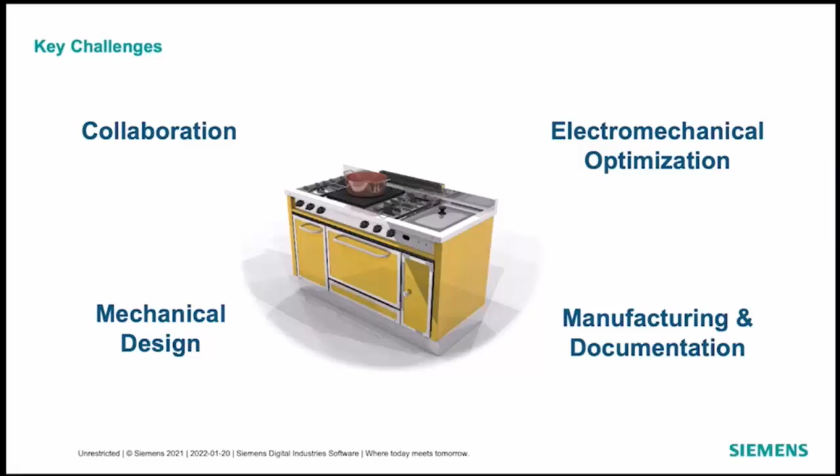The first key challenge we'll discuss is collaboration. Collaborating with customers and suppliers, you need to collaborate quickly and easily with suppliers and customers, then share multi-CAD design data in a controlled way while protecting intellectual property.

Next is managing projects and changes. You need to manage data that's created and consumed throughout the product lifecycle, manage engineering changes efficiently, then manage release to manufacturing.

Last is managing customer and regulatory requirements, ensuring that the device, as delivered to the end user, meets the requirements and complies with industry regulations.

The next challenge is for mechanical design: designing plastic enclosures and housings. Consumer products often use plastic components for enclosures, housings, handles, covers, etc. You need to design plastic components quickly and accurately.

Then design sheet metal enclosures, including enclosures and housings for power supplies and electrical components, with faster 3D mechanical design to create complex designs quickly and accurately. We use proven components and catalog parts where possible to speed design.

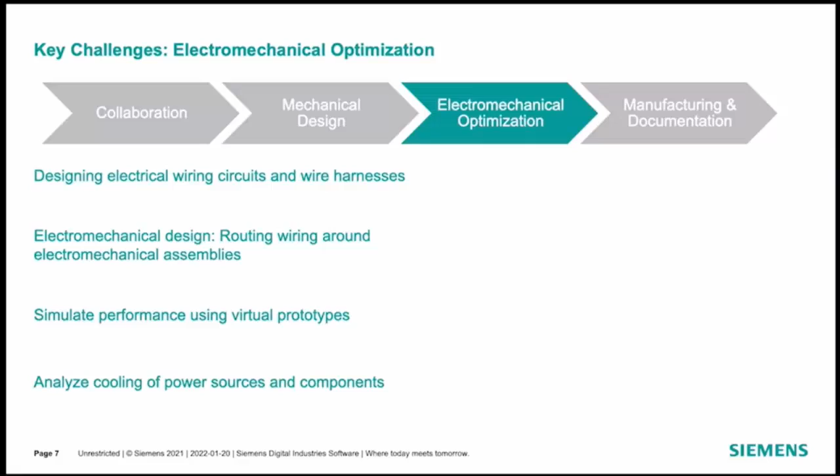For the last key challenge, manufacturing and documentation: manufacturing accurately and efficiently, minimizing the cost and time required to build physical prototypes, and manufacturing small volume parts efficiently.

Manufacturing accurately and efficiently also means reducing errors and rework in manufacturing, choosing the best manufacturing process, and taking advantage of new manufacturing technologies.

Then create manufacturing instructions and end-user manuals, ensuring that consumer durables are manufactured and used correctly to ensure performance and reliability.

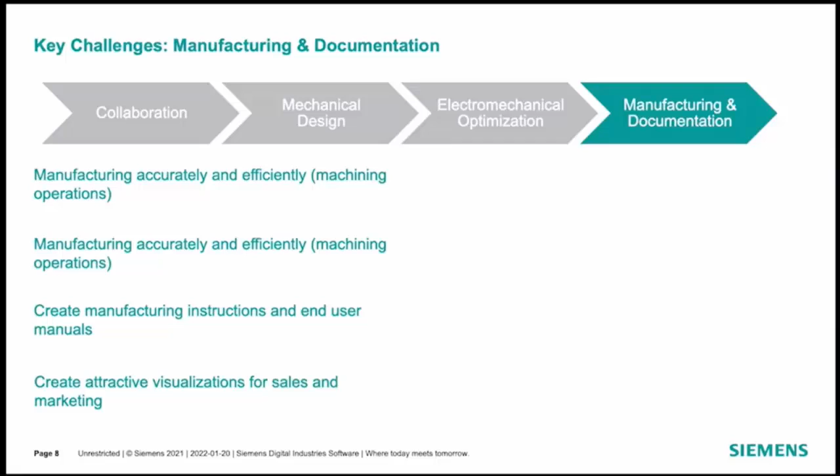Create attractive visualizations for sales and marketing to improve communication of design to prospective customers and communicate the unique value of innovative solutions.

Now let's take a look at the solutions and what's new in Solid Edge 2022. Our first solution is for collaboration.

First is data management. Here are some of the challenges: you need to manage data that is created and consumed throughout the product lifecycle, manage engineering changes efficiently, and manage release to manufacturing. So how can we help?

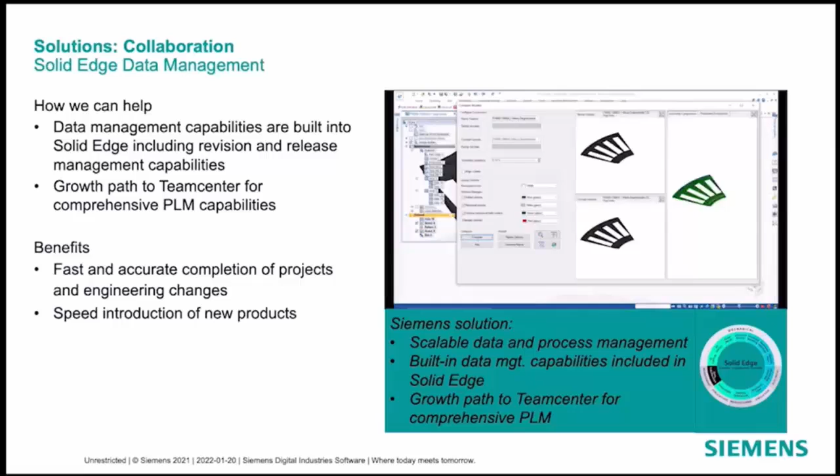Data management capabilities are built into Solid Edge, including revisions and release management capabilities, with growth path to Teamcenter for comprehensive PLM capabilities. The benefits include fast and accurate completion of projects and engineering changes, and speeding introduction of new products.

Next is requirements management. The challenge is ensuring that the device as delivered to the end user meets the requirements and complies with industry regulations. How can we help?

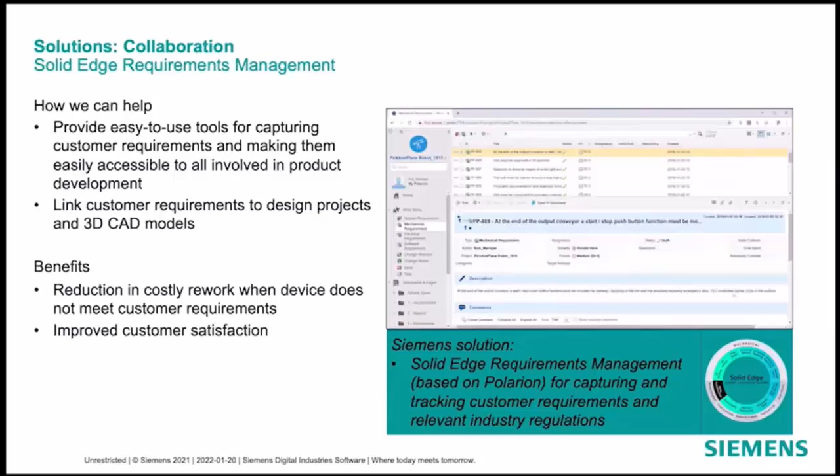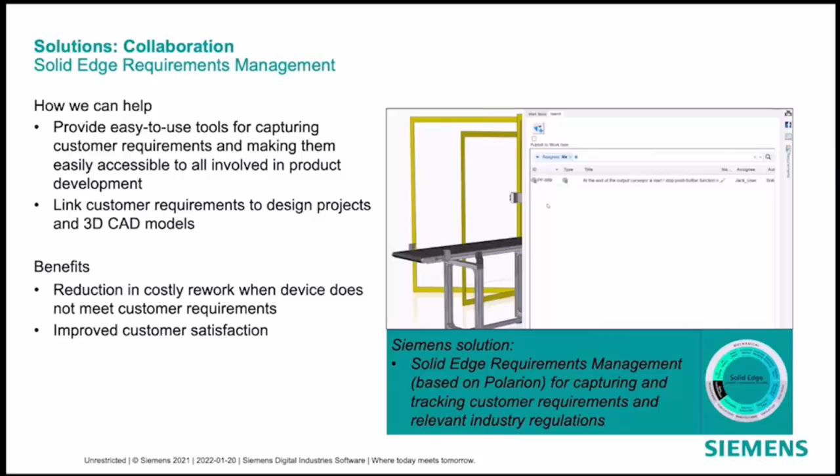We provide easy-to-use tools for capturing customer requirements and making them easily accessible to all involved in product development, then link customer requirements to design projects and 3D CAD models. The benefits are reduction in costly rework when a device does not meet customer requirements, and improved customer satisfaction.

Then we have Xcelerator Share, augmented reality, messaging and notifications, any device instant-on access, multi-user override protection, and connection to Teamcenter. How can we help? With easy-to-use cloud-based collaboration tools for sharing multi-CAD data with suppliers and customers, and integrated visualization, markup, and augmented reality capabilities for multi-CAD data.

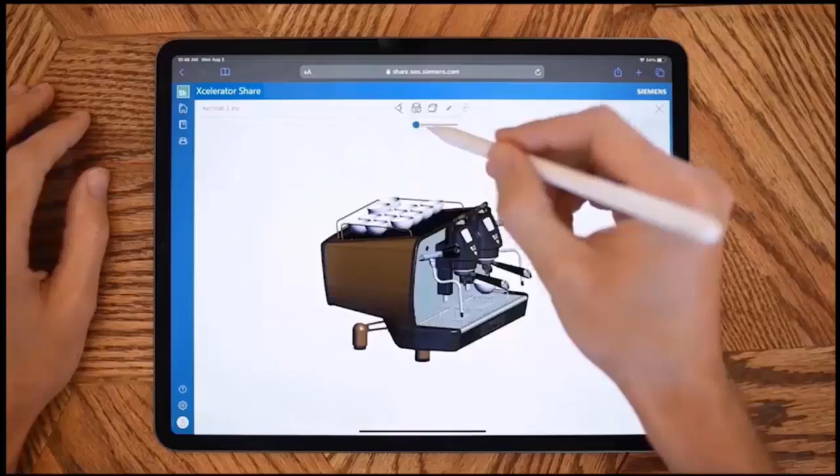Let's take a look at Xcelerator Share. For CAD files, there is an integrated 3D view environment where you can hide and show parts, explode assemblies, section, measure, and markup. This is great for manufacturing and design reviews.

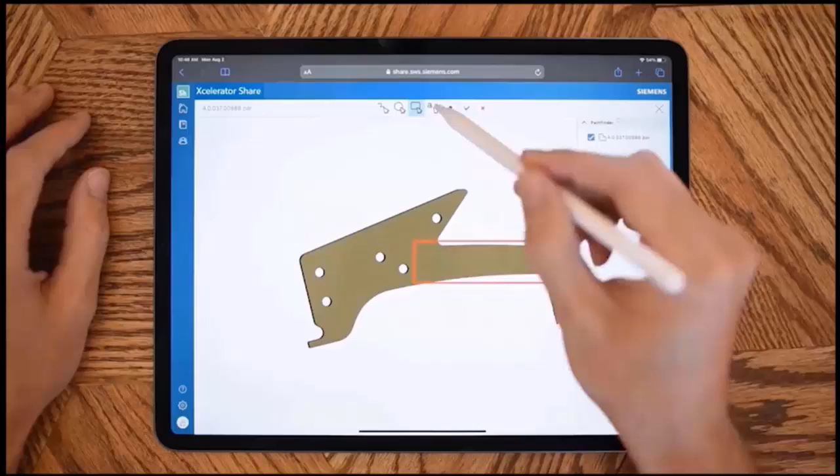Here, we're identifying the need for some changes with the markup and some text annotations. Xcelerator Share offers maximum traceability as all markups are recorded, enabling a conversation back and forth on any of the issues you're tracking. It records who made any markup, and when it was made, and we can also easily go back to the markup at any time.

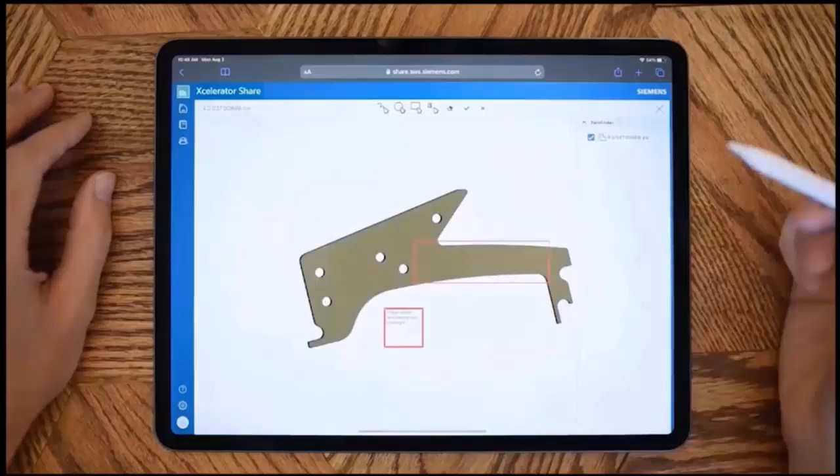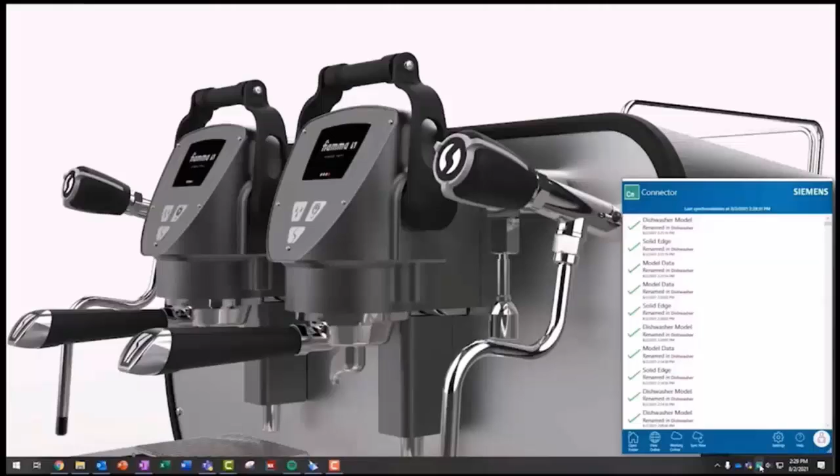With Share, you can also connect your CAD, synchronizing your data from your desktop to the cloud. Here we have the same coffee machine project on our desktop, represented simply as a folder. Any data that we have in the folder will get synchronized in the background. In Solid Edge, we can securely sign into Xcelerator Share and see those cloud-based projects.

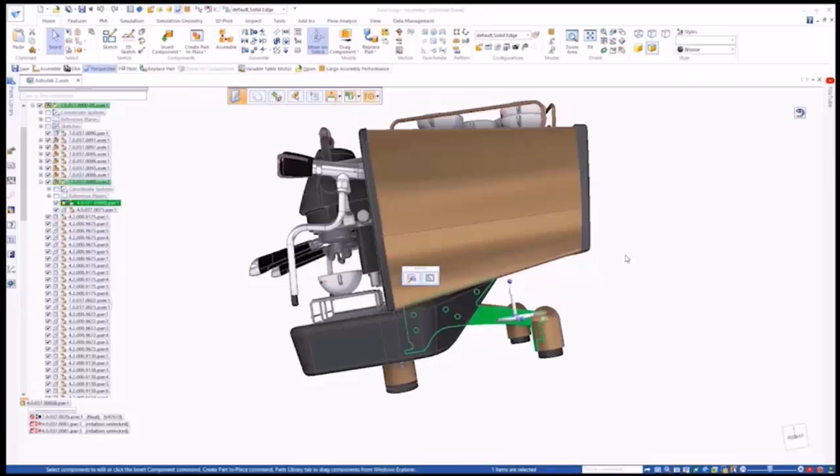The espresso machine can be opened and we can get right to work on the part in question. The designer can easily access these same markups in the cloud directly from within Solid Edge, and then go ahead and complete the work, which in this case is to add a cutout to the leg of the espresso machine. Once completed, another markup continues that two-way conversation and collaboration with other stakeholders on that issue is tracked appropriately.

Another great capability is sharing projects with anyone. Simply enter the email address of the person you'd like to share with and choose their access permission level. Here, we can choose view, or view and download, or edit and download, depending on how we want to protect our intellectual property. We will share this design with one of our colleagues and our customer and give them appropriate access.

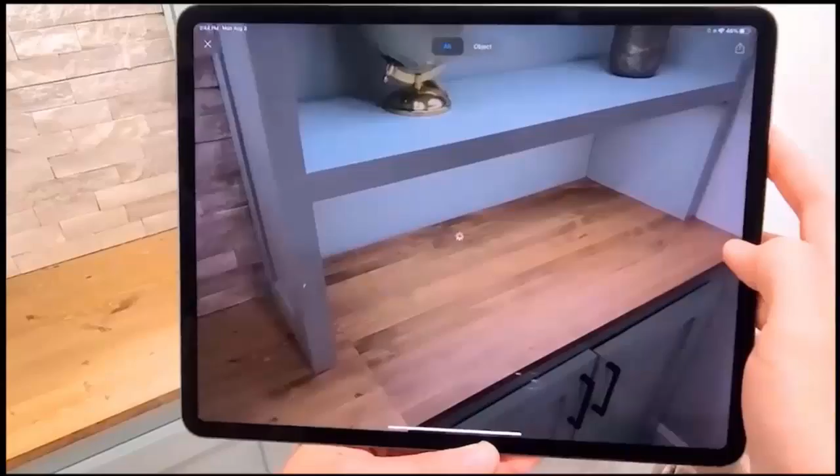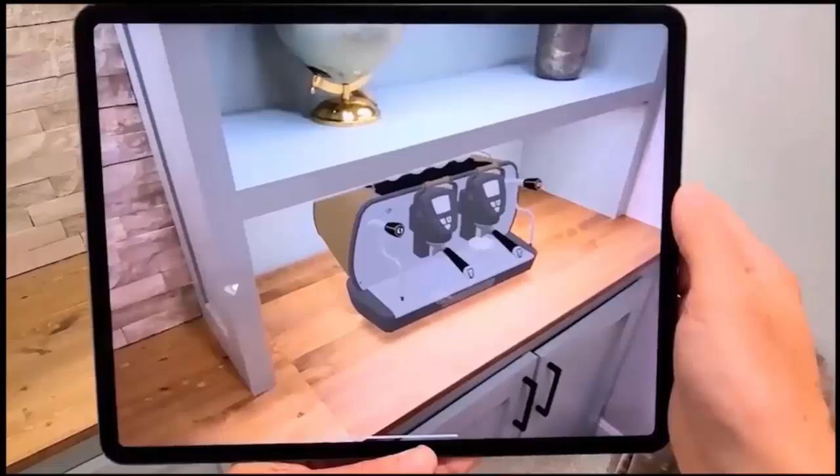Finally, with Share's augmented reality functionality, we can see exactly how our design will look in a real-world environment. It will snap the design onto any surfaces seen through the camera lens at the correct scale. Finger gestures can be used to manipulate the model and easily visualize what the design looks like in the real environment.

The ability to collaborate effectively is an increasingly important area today, as traditional supply chains are now under pressure from an uncertain environment around tariffs and global health concerns. Examples of collaboration can include working with a customer in a different location to review the design of a component, or working with the manufacturer of mold tooling to investigate an issue encountered in the manufacturing process.

Siemens has easy-to-use cloud-based collaboration tools that enable you to share design data created in different CAD formats with customers and suppliers, and this can be done in a way that protects the intellectual property of your designs.

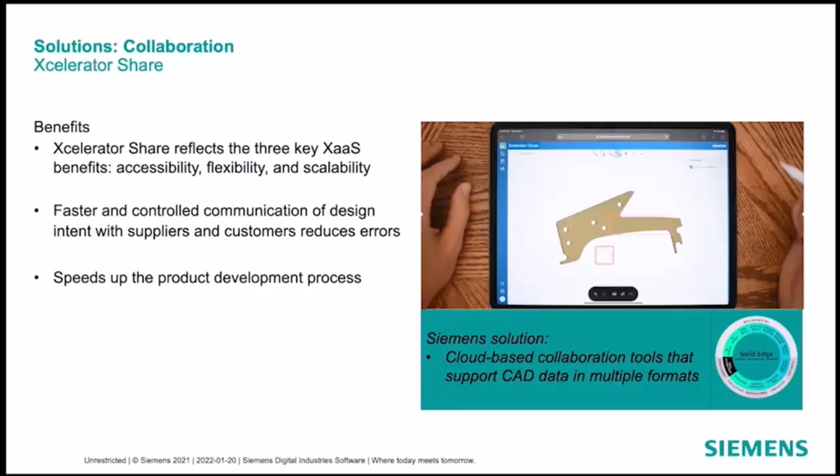So the benefits: Xcelerator Share reflects the three key XaaS benefits: accessibility, flexibility, and scalability. Faster and controlled communication of design intent with suppliers and customers reduces errors and speeds up the product development process.

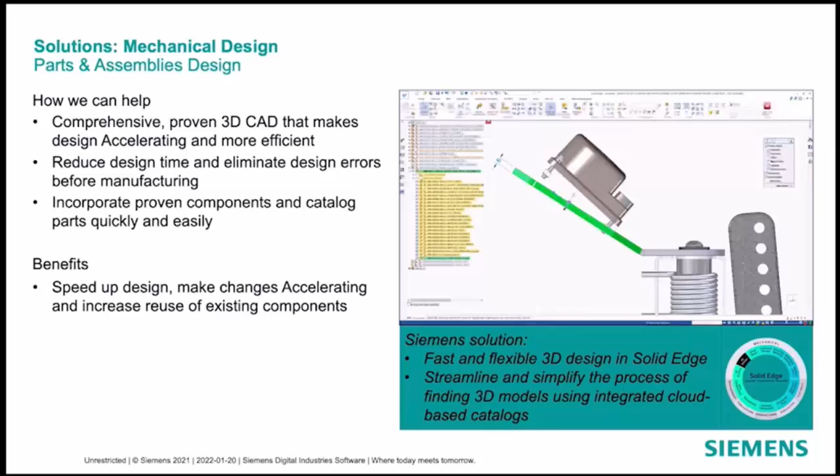Next solution is for mechanical design, for parts and assembly design. So the challenges: create complex designs quickly and accurately, and reuse proven components and catalog parts where possible to speed design. So how can we help?

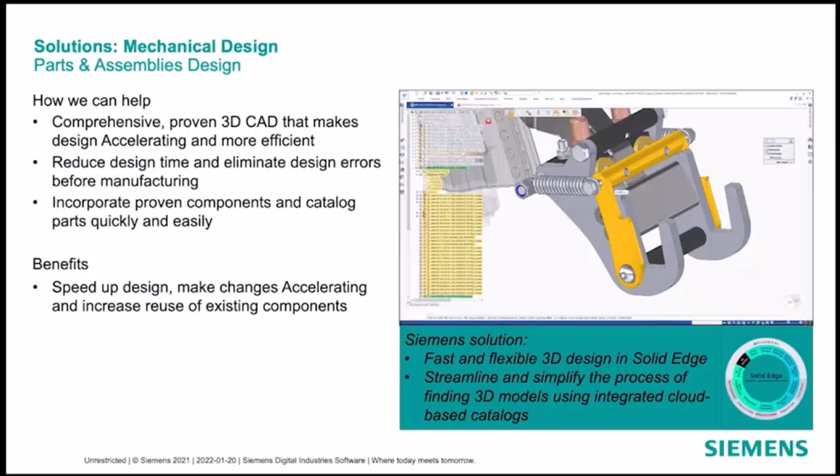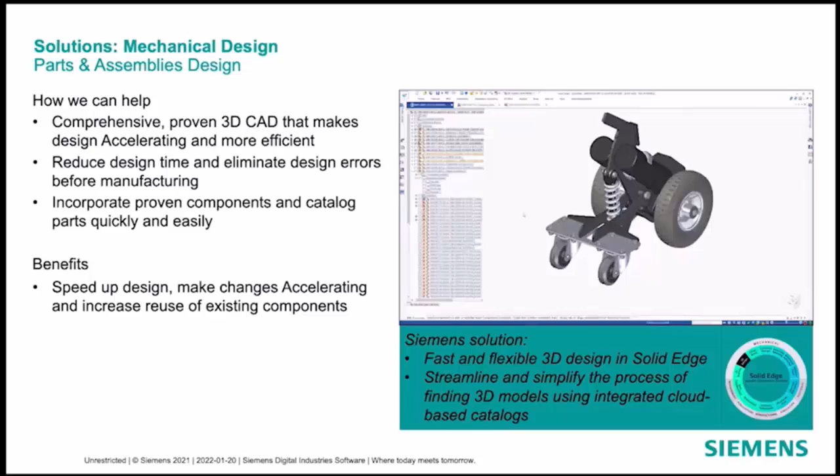Comprehensive, proven 3D CAD that makes design accelerating and more efficient: reduce design time and eliminate design errors before manufacture, and incorporate proven components and catalog parts quickly and easily. So the benefits: it can speed up the design, make changes accelerating and increase reuse of existing components, and deliver new products sooner and with lower business risks.

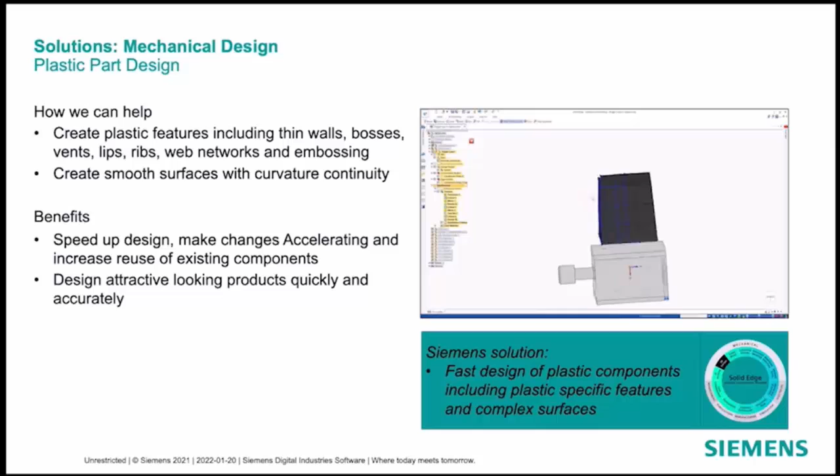Then for plastic part design, so the challenges: electronic devices often use plastic components for enclosures, housing, handles, and covers, and design plastic components quickly and accurately. So how can we help?

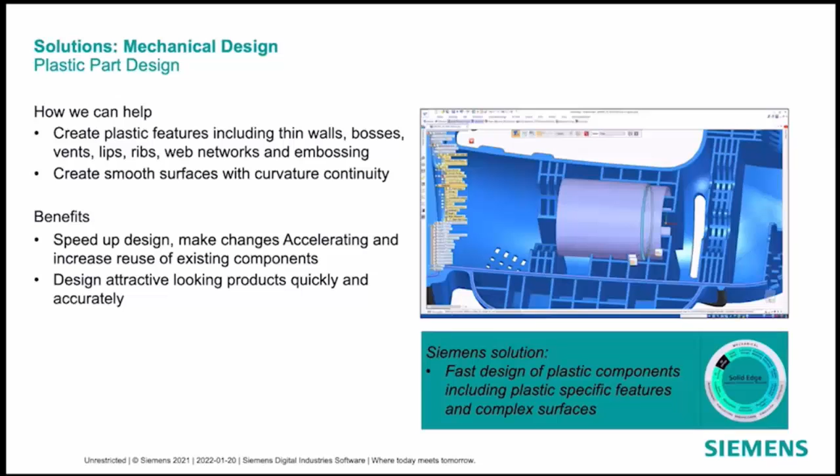Create plastic features including thin walls, bosses, vents, lips, ribs, web networks, and embossing, and draft face analysis to help prepare parts for molding processes. Then the benefits: speed up design, make changes accelerating and increase reuse of existing components, and deliver new products sooner and with lower business risks.

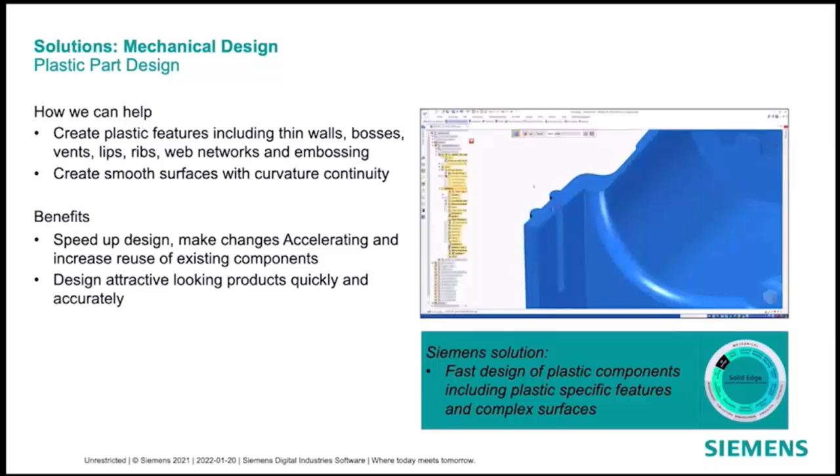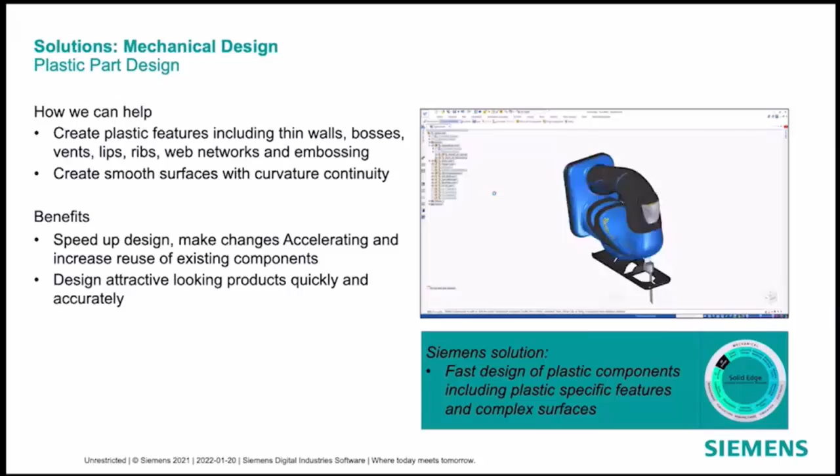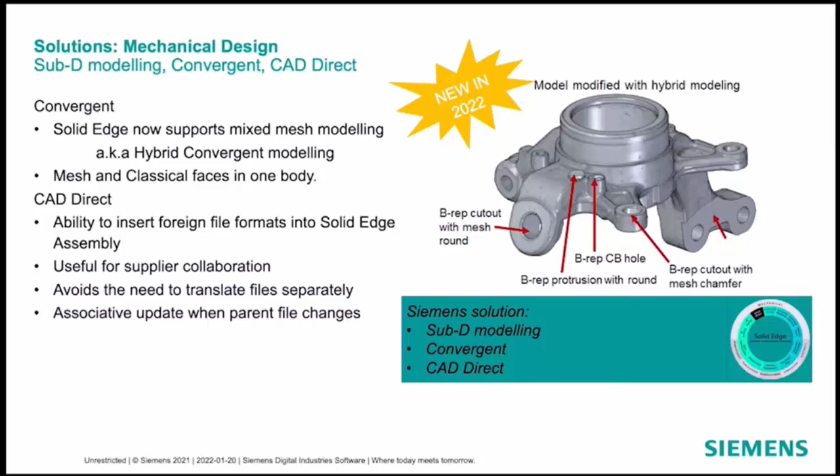The benefits: streamlined sheet metal design and manufacturing that reduces cost and speeds delivery. New in Solid Edge 2022 for subdivision modeling, Convergent and CAD Direct. For convergent modeling, Solid Edge now supports mixed mesh modeling, also called hybrid convergent modeling, so mesh and classical faces in one body. For CAD Direct, an ability to insert foreign file formats into a Solid Edge assembly, useful for supplier collaboration, avoids the need to translate files separately, with associative update when parent files change.

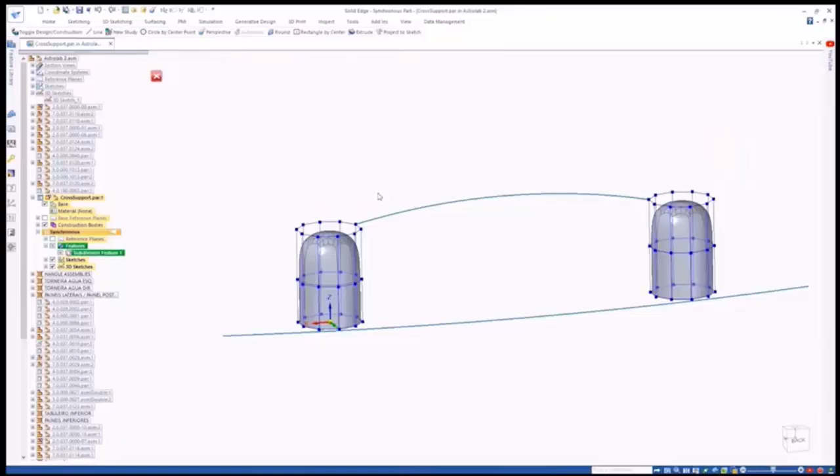Complex shapes are created even faster with great new enhancements in Solid Edge, as shown here in our espresso machine. The new Bridge command effortlessly connects edges or faces of subdivision cages and creates a lofted structure between them. To further refine the shape of the part and match the outward curve of the machine, we'll use the new Align to Curve command.

Simply select the cage vertices, define the direction, and pick the curve. During this process, it's possible to manually define a spline curve or even use gestures by clicking and dragging to fluidly adjust the form as required.

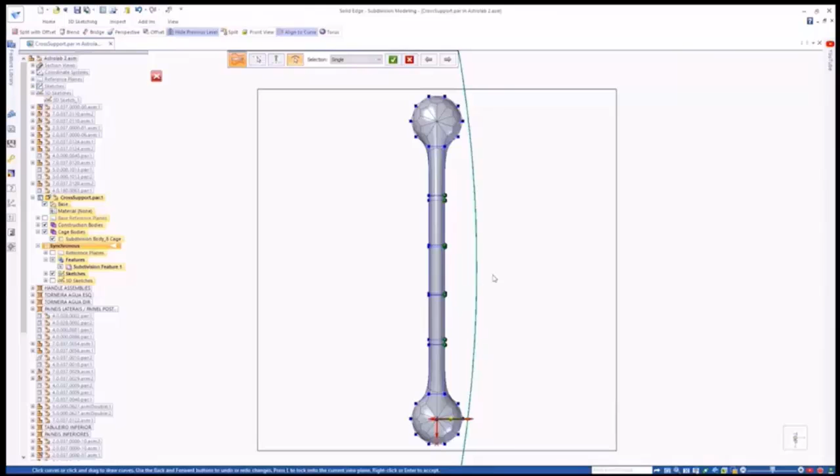Split with Offset is another option that speeds up adding detail to a face by offsetting it inwards. This allows us to push the resulting faces to create cutouts for the rubber feet on the machine.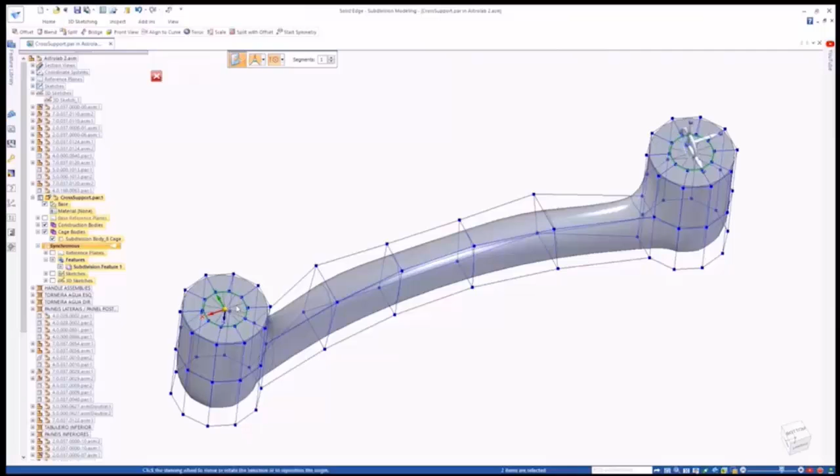Now we'll replace this handle with a new design that has been 3D scanned. This results in a mesh model that we'll import. We can visualize the mesh with a new Show Facet Edges command. In this case, we'll clean it up a little by remeshing it.

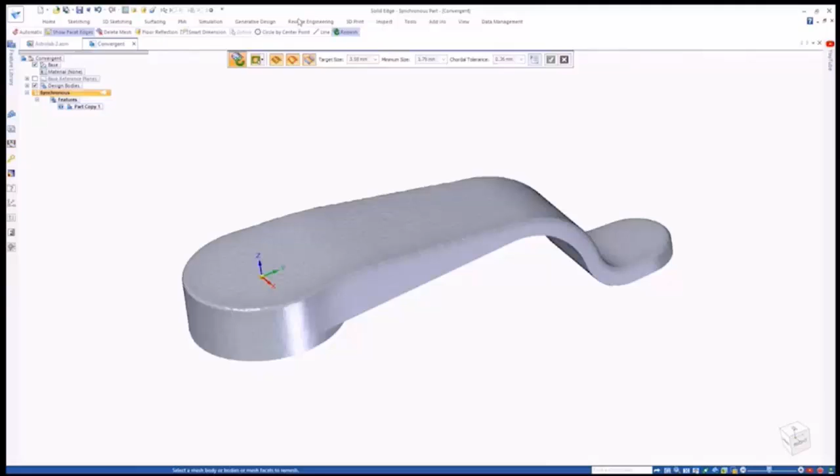After automatically identifying the regions of the model, we can start sketching directly on the planar faces that have been recognized. As we add a series of cutouts to reduce the weight and improve the appearance of the part, notice that the resulting geometry isn't faceted.

Solid Edge now seamlessly combines mesh and B-rep geometry in the same body or part. Here some rounds have been added, and we'll add additional cutouts to reduce the material in this area.

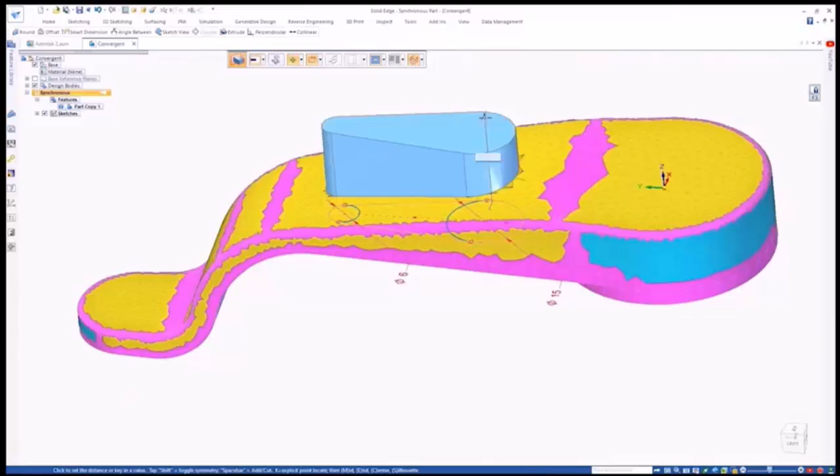Once the cut is complete, it can be patterned. Again, notice the resulting geometry isn't faceted. We're doing all this on a mesh model without the need to fully reverse engineer it.

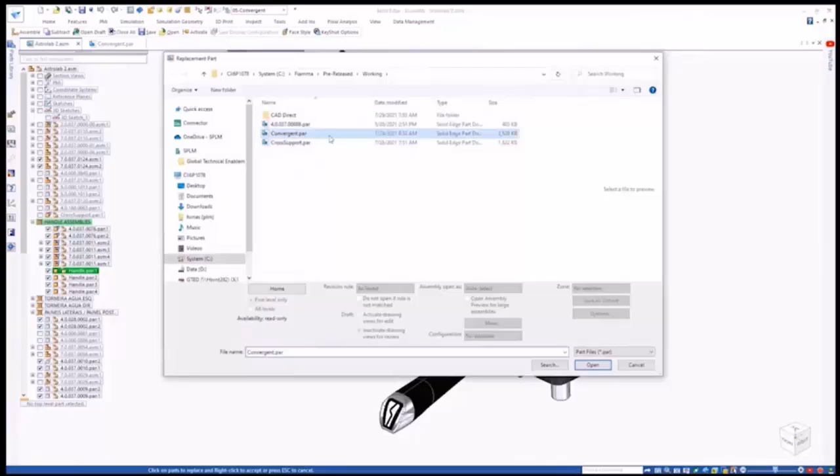Back in the assembly, we can swap out the old handle for our new design and see how it looks. We're missing new mounting holes to finish the part. This can be easily resolved by using the geometry of existing components to subtract the material directly from the mesh model. These new capabilities further enhance the ability to use mesh models in the design process.

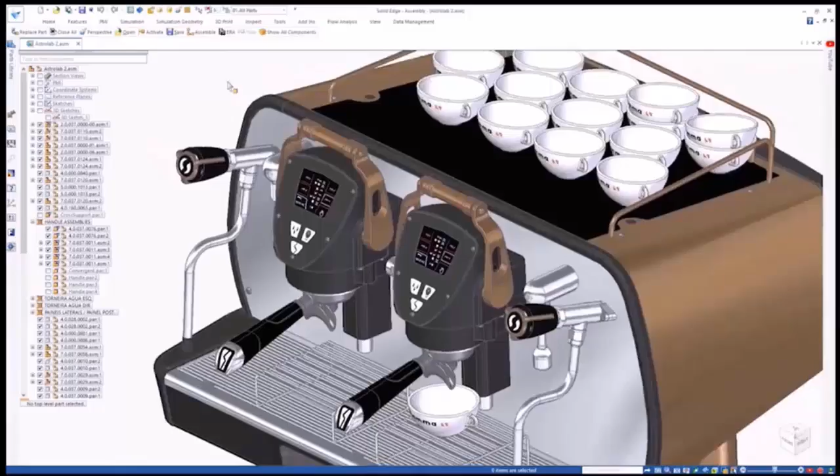The new CAD Direct command enables the use of foreign parts and assemblies in Solid Edge without requiring any translation. The water boilers being added here were designed in NX. Once inserted into Solid Edge, they can be positioned just like any other assembly. Since we need two of these, we'll simply copy it into place and automatically constrain it.

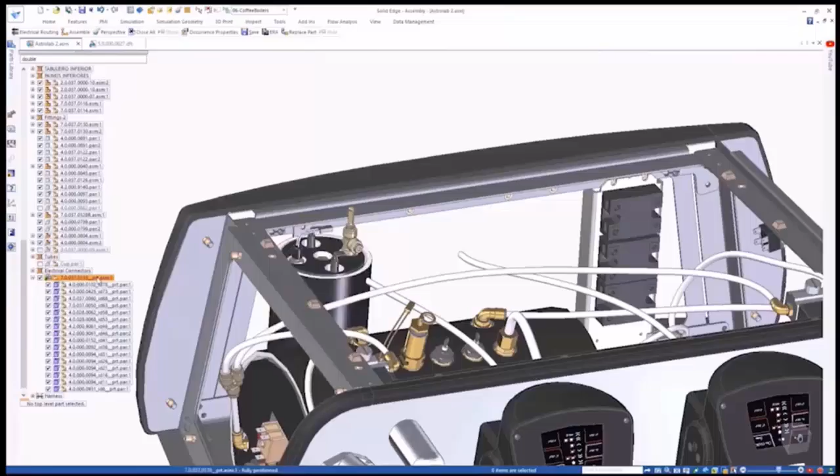Unfortunately, the boilers don't quite fit our design; they need to sit lower down. Going back to NX to fix the issue, we can make a change to the mounting bracket to make it longer, then save the assembly. Since Solid Edge continually references the NX assembly, a simple update brings the changes for us.

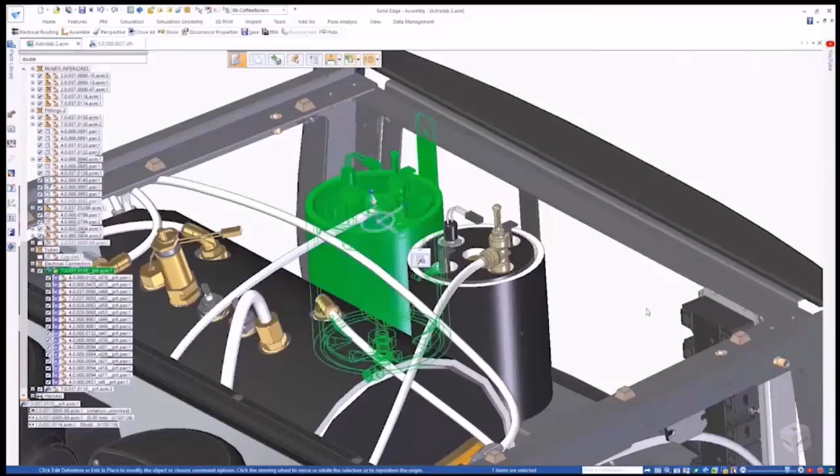Here are other benefits for subdivision modeling, Convergent, and CAD Direct. New built-in 3D design capability improves productivity when working with geometry from popular CAD systems. It inserts files directly into a Solid Edge assembly without needing to translate the file separately, maintaining associativity. Unique hybrid model capabilities allow B-rep and mesh geometries to coexist in the same model for downstream assembly use, speeding workflows, making mesh models even more useful, and significantly reducing modeling time.

Now, for the next solution: electromechanical optimization, starting with Solid Edge wiring design. Here are the challenges: design electrical wiring schematics, wire harnesses, and control panels quickly and easily, and select optimal wire gauges and fuse ratings.

So how can we help? Software for fast creation of data-driven wiring schematics and control panel layout, and validation of correct functioning of electrical circuits as they are designed. The benefits: we can quickly design wiring circuits and wire harnesses, and key attributes of electrical circuits, including wire gauges, fuse ratings, and open and short circuits, are checked during the design process.

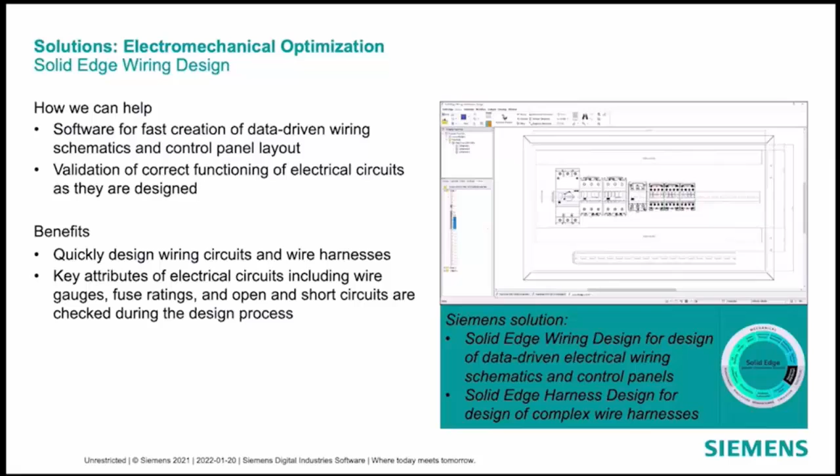Next is for Solid Edge routing. The challenges are routing electrical wiring and wire harnesses around systems with limited space, which is increasingly complex, and packaging PCBs in confined spaces. How can we help? Semi-automatic routing of wiring and wire harnesses around complex 3D models, establishing correct wire lengths, and integrating PCB designs into electromechanical assemblies. The benefits: minimize the need to create physical prototypes to reduce problems in installation and operation of wiring, and integrate PCB designs into electromechanical assemblies quickly and accurately.

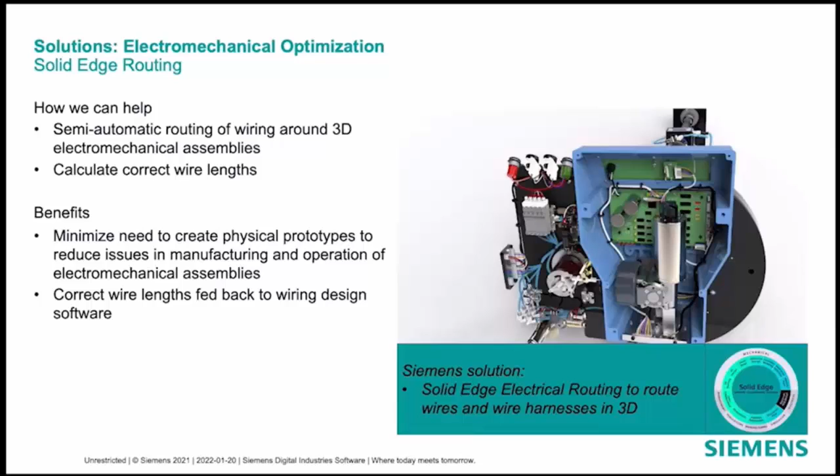For structural and flow simulation, we can help with integrated simulation tools including static, dynamic, and fatigue analysis, and integrated fluid flow and heat transfer analysis. The benefit is a significant drop in cost and time to delivery as engineers optimize products and identify and resolve problems before manufacture.

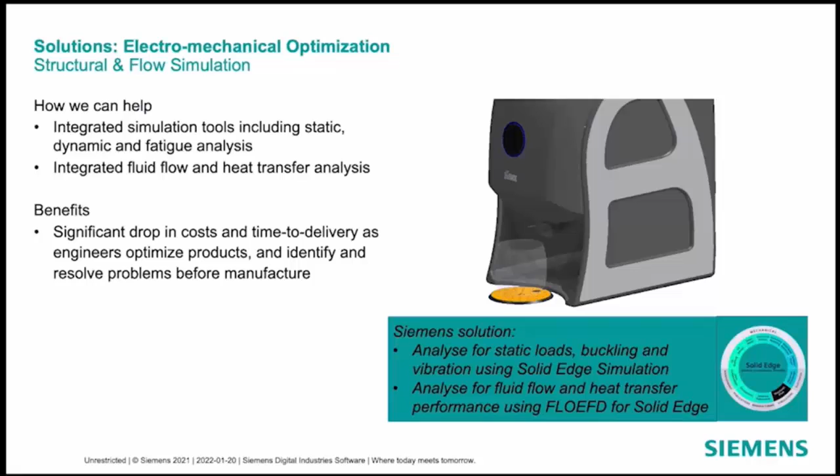For thermal simulation, the challenges are that electronic components and power supplies act as heat sources, and we need to ensure heat is dissipated adequately and that hotspots are within allowable parameters. How can we help? Integrated simulation of electronic power sources and heat dissipation. The benefit: ensure heat is dissipated correctly and hotspots are kept within allowable limits.

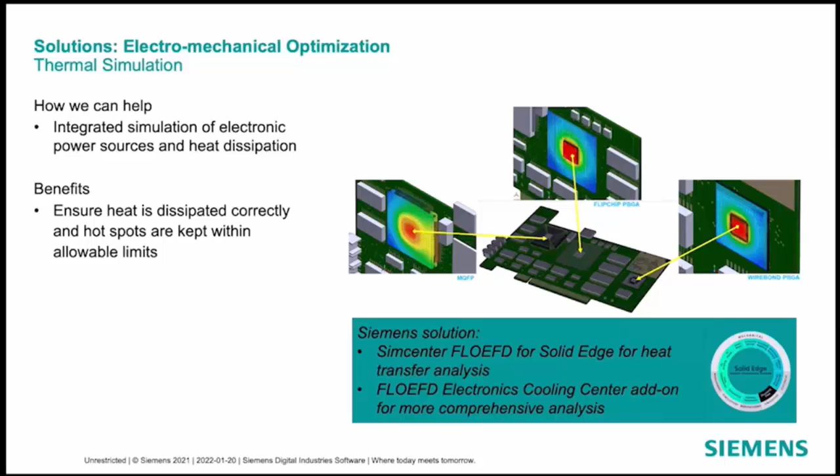Simcenter FLOEFD for Solid Edge is a computational fluid dynamics, or CFD, application that is integrated with Solid Edge. It includes heat transfer analysis capabilities so engineers can simulate cooling of heat-generating components. In addition, the FLOEFD Electronics Cooling Center has a more comprehensive set of capabilities for analyzing cooling of electronic components.

Up next is for manufacturing and documentation.

For additive manufacturing, the challenge is to manufacture small volume parts efficiently and minimize the cost and time required to build physical prototypes. How can we help? Prepare parts for manufacturing on in-house 3D printers and access a cloud-based bureau for additive manufacturing of parts in a variety of materials. The benefits: a significant drop in cost and time to deliver as engineers optimize products and identify and resolve problems before manufacture, and minimize the need for large stocks of spare parts.

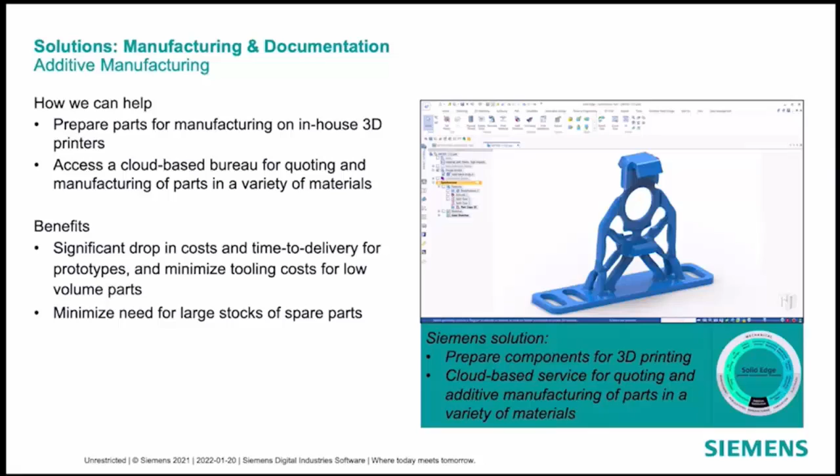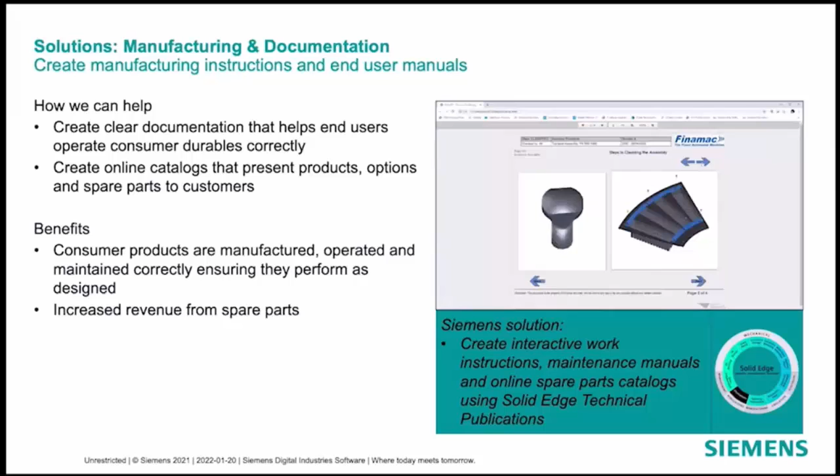For creating manufacturing instructions and end user manuals, the challenge is to communicate design and options to prospective customers, communicate correct manufacturing processes to shop floor operatives, and ensure products are installed, used, and maintained correctly to ensure performance and reliability. How can we help? Create interactive 3D technical publications that clearly communicate the correct manufacturing process, create clear documentation that helps end users use and maintain products correctly, and create online catalogs that present products, options, and spare parts to customers. The benefits: the product is manufactured, installed, and maintained correctly, ensuring it performs as designed, and increased revenue from spare parts.

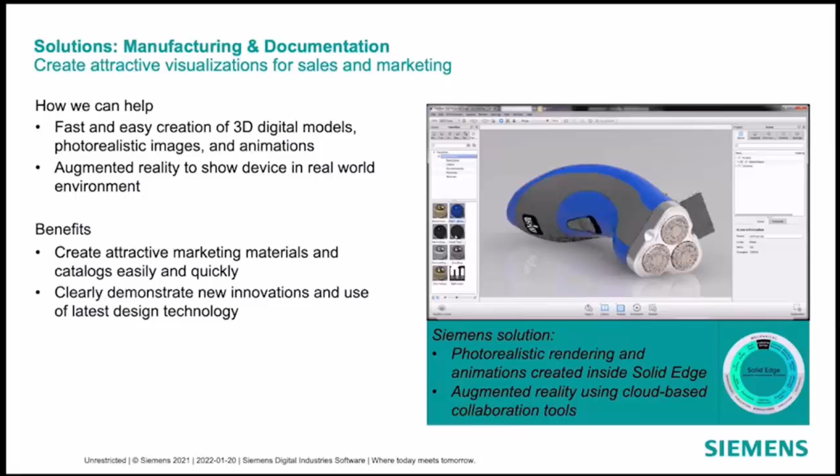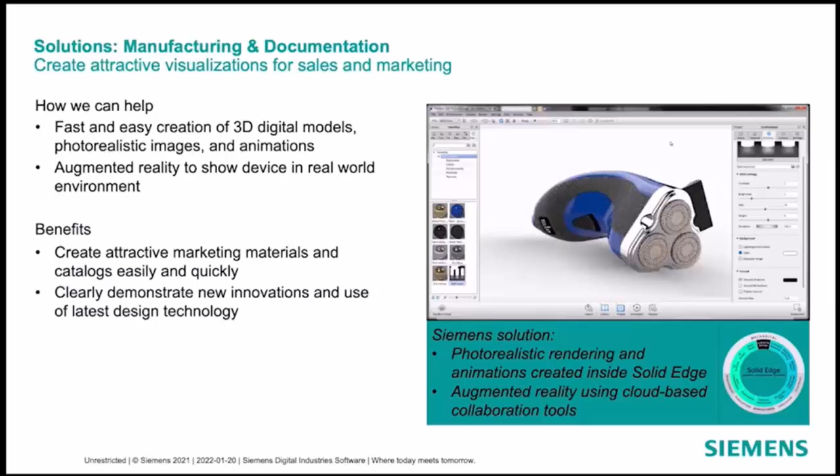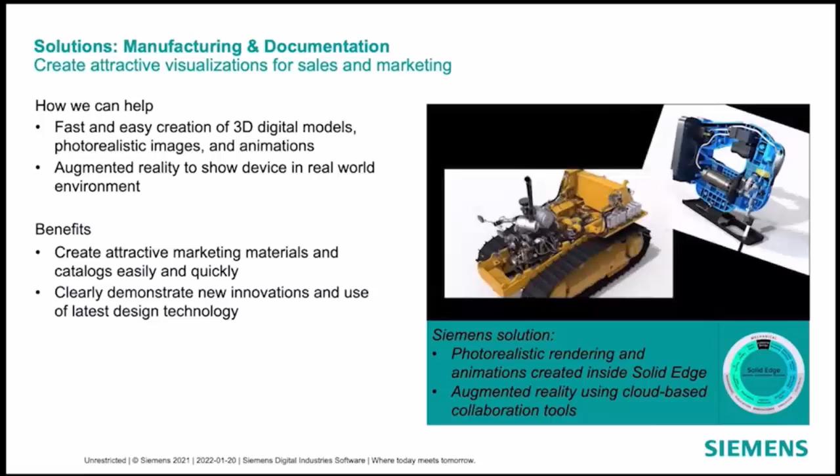Create attractive visualizations for sales and marketing. The challenges are the need to improve communication of designs to prospective customers and to communicate the unique value of innovative solutions. How can we help? Fast and easy creation of 3D digital models, photorealistic images, and animations, and augmented reality to show the product in a real-world environment. The benefits: it creates attractive marketing materials and catalogs easily and quickly, creates custom marketing materials, and clearly demonstrates new innovations and use of the latest design technology.

Now for manufacturing operations, here are the challenges: errors and rework in manufacturing, choosing the best manufacturing process, and taking advantage of new manufacturing technologies. How can we help? Create machining toolpaths and simulations based on digital models, work with different CAM solutions while creating toolpaths that are associative to the CAD model, and create interactive work instructions. The benefits: it reduces errors and rework in manufacturing, faster manufacturing process, and designs optimized for manufacturing.

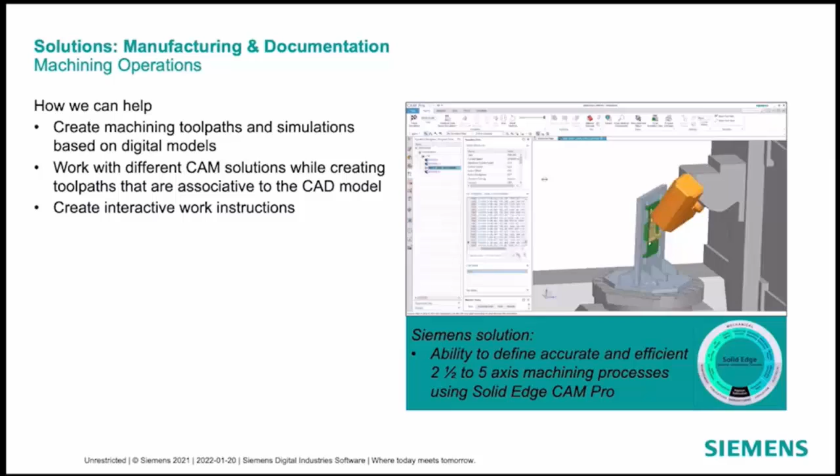Solid Edge CAM Pro is our solution for creating toolpaths for machining operations. Toolpaths for Solid Edge CAD models can also be created using most of the third-party CAM software solutions that are available.

Next up is something of real excitement. We are now including fully functional 2.5-axis milling capability in our Solid Edge Classic, Foundation, and Premium products for customers who are on active maintenance. Here's a preview of its capabilities.

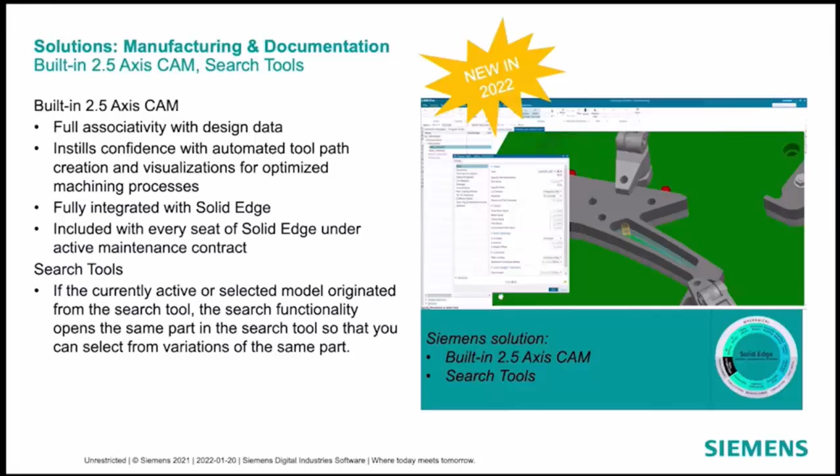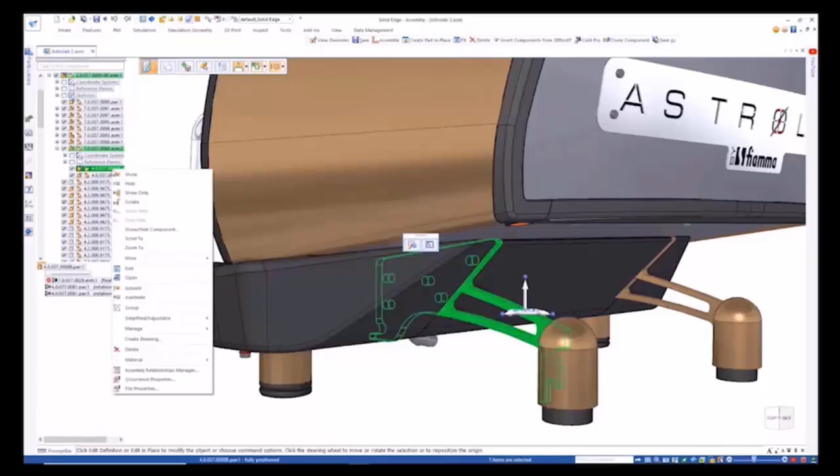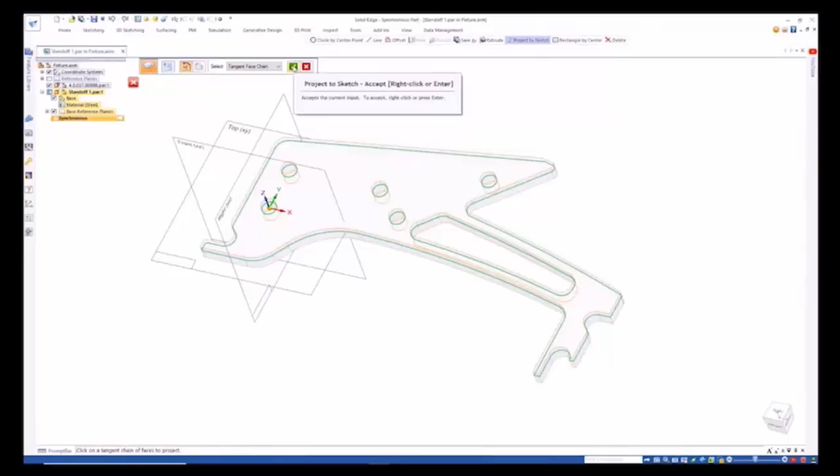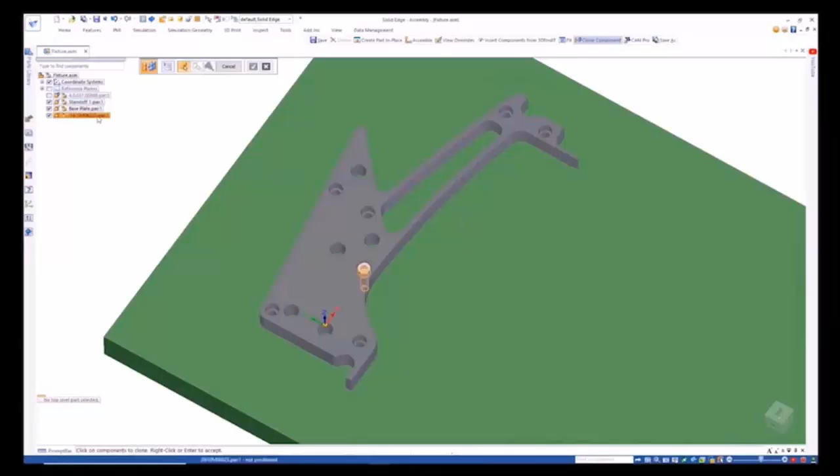With Solid Edge CAM Pro 2.5-axis now included with every Solid Edge license, let's explore the powerful yet easy-to-use tools with the Fiamma coffee machine as our example. We'll leverage Solid Edge CAM Pro to create the manufacturing toolpath for the machine's rear legs. First, we'll use the Solid Edge assembly tools to create the shape to represent the stock part, and also the parts from the fixture assembly, including the stand-off plate we see here. As we add additional fixing holes from the standard database, we'll also make use of the vast supplier catalogs in 3DFindIt to get an appropriate socket head cap screw. We're seeing that Solid Edge is a great CAD for CAM tool, but also that the Solid Edge CAM Pro solutions handle assemblies as well as single parts, which is very important when creating toolpaths and making sure to avoid collisions with the fixture components.

We'll machine the design in two setups. Step 1 is to mill the pocket and drill the holes. Step 2 is to machine the profile. One click sends the entire assembly to Solid Edge CAM Pro.

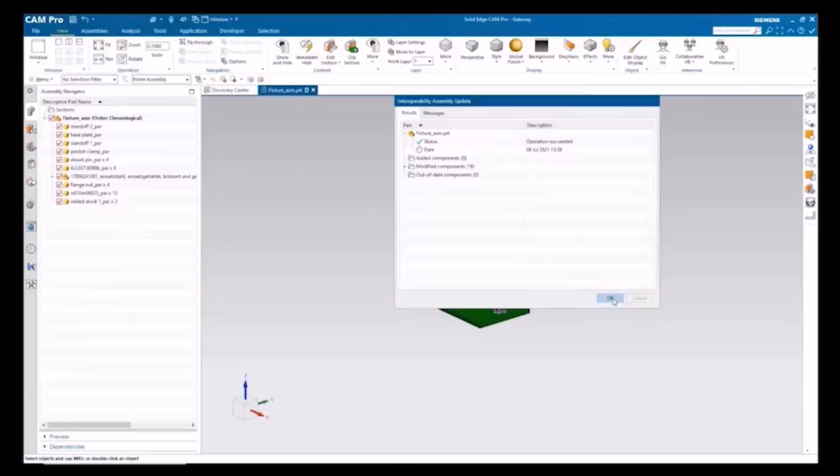Associativity is maintained to the complete assembly. So if there are any last-minute changes, we can quickly accept them and continue the NC programming process.

New for Solid Edge CAM Pro is the ability to create adaptive roughing toolpath for 2.5-axis operations, included at no additional cost. These are faster than traditional toolpath and extend the life of the cutting tools.

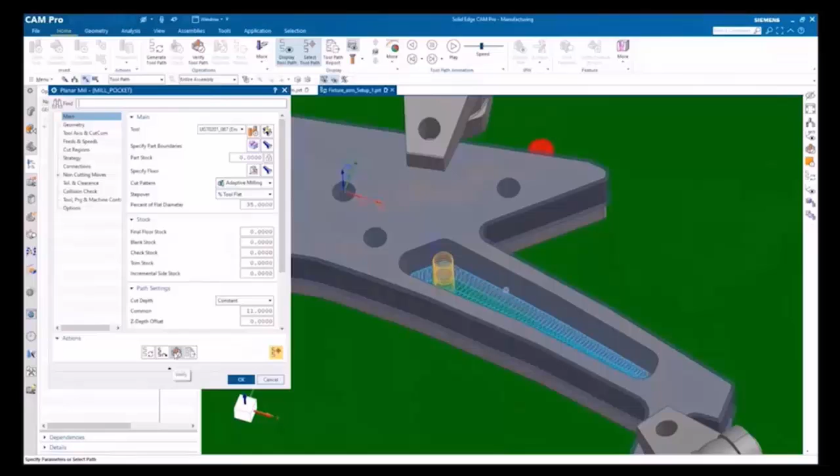Solid Edge CAM Pro also has great visual tools to build your confidence. Here, we're using toolpath animation with material removal to see the cutting effect. Built-in productivity tools like right mouse button context menus allow a user to sail through the NC programming process.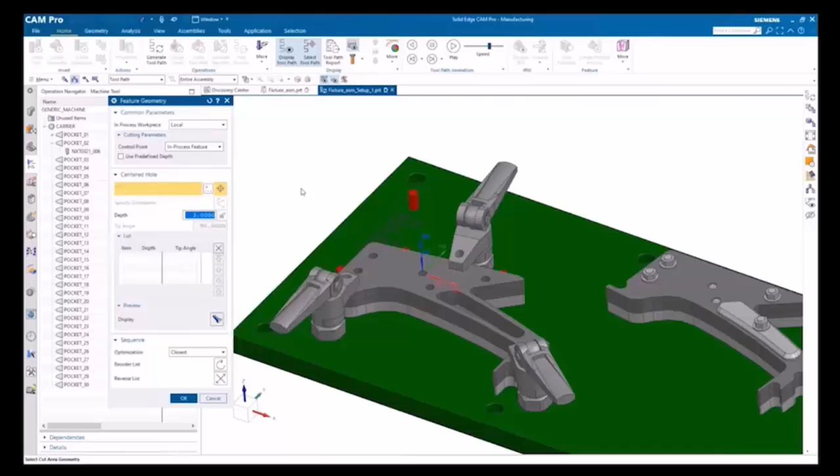Here, we'll create a spot drilling operation for the 5 holes in the support. Notice the graphical pop-up hints that help us with operational selection. Graphical helps are also available in geometry selection. Each time we select a hole, we get a preview of the machining that will take place. At any point in the process, we can get visual feedback on our decisions.

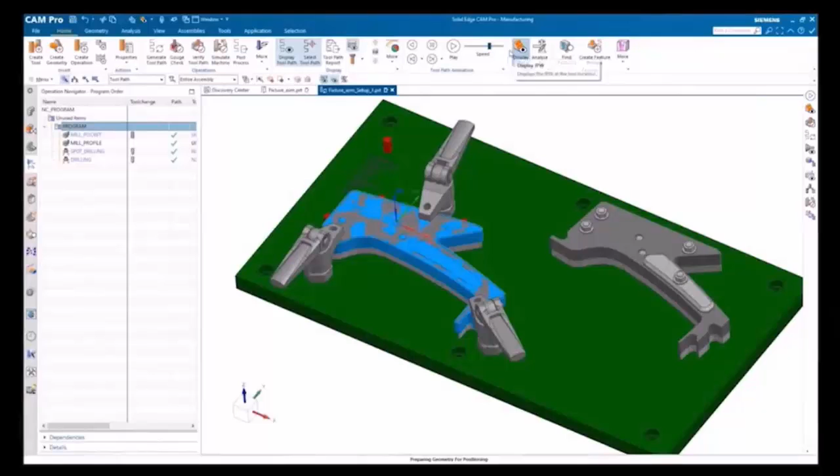Now that our CNC program is complete, let's run the whole thing through visualization before post-processing. Pocketing, profiling, and hole making, Solid Edge Cam Pro can do all that and much more.

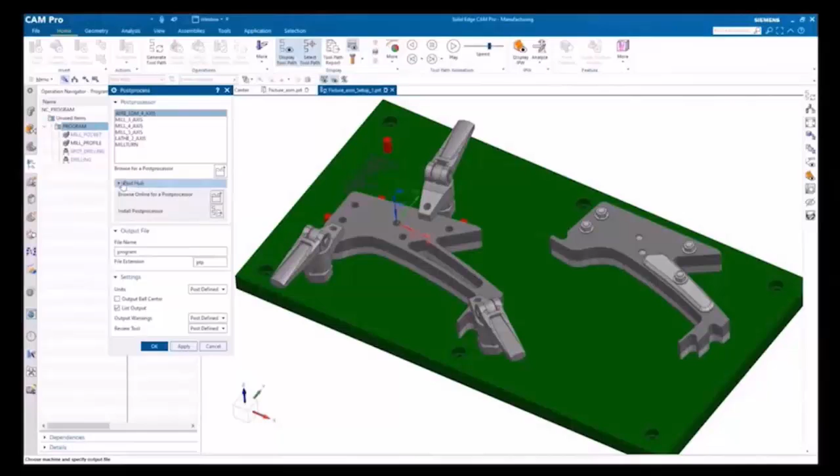No CNC job is finished until it has been post-processed for a specific machine. That's where PostHub, an online database of more than 1,200 post-processors, really shines. You can filter using several different criteria to find exactly the one you need. PostHub is also constantly being updated with new posts.

As you've just seen, CamPro 2.5-axis milling allows users to maintain full associativity with design data, while instilling confidence with automated toolpath creation and visualizations for optimized machining processes. And it's fully integrated with Solid Edge.

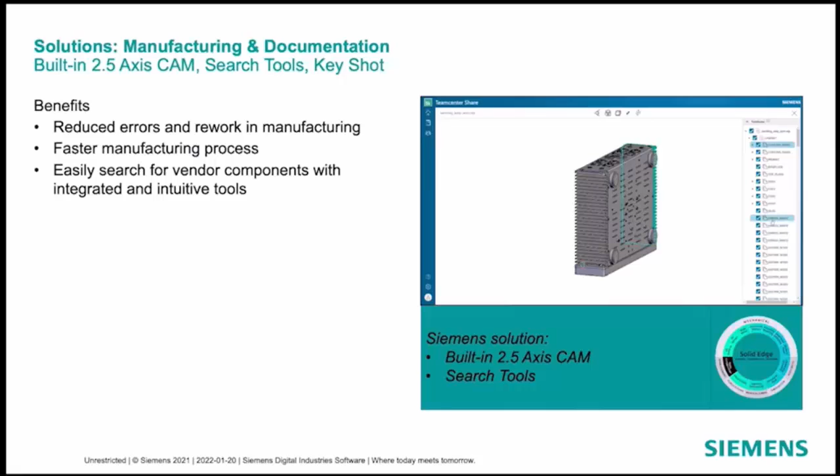So the benefits: it reduces errors and rework in manufacturing, faster manufacturing processes, and easily search for vendor components with integrated and intuitive tools. New in Solid Edge 2022 is dynamic visualization.

Dynamic visualization provides interactive access to document properties based on report containing rules. Rules are easily built with MS Excel-like filters within interactive tables. Interactive user-defined tables with sort and Excel-like filters.

Color display of your query results. Create rules easily from filtered tables. Fast indexing of properties while assembly loads. Export reports to be shared with other users and other assemblies. And support for standard and custom properties, as well as in-session status such as modified since last save.

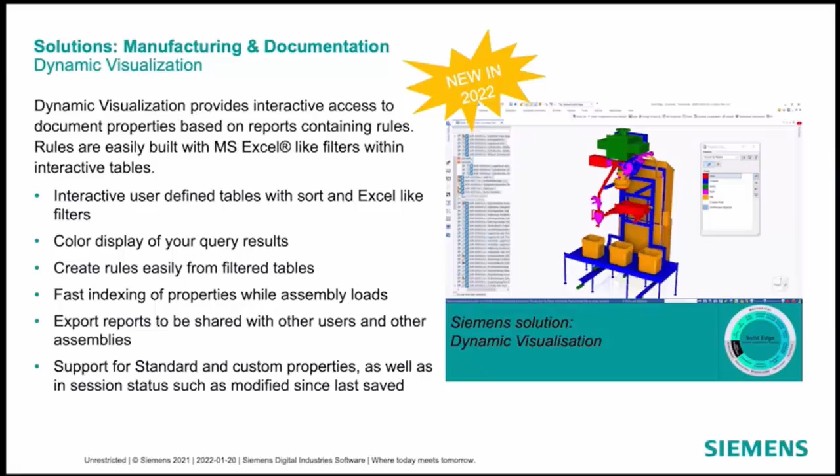Turning our attention to Solid Edge's built-in data management functionality, we can see that dynamic visualization is available here too. With dynamic visualization, we'll perform a quick material check on our Fiamma Espresso machine to confirm the right materials are assigned to each part.

Once the report has run, we can see an issue. So the 2 small handles at the rear of the design are colored red, indicating they are currently defined as aluminum, but they should be green in this case, signifying they are stainless steel.

To correct this, we'll ask the design team to revise the handles and correct the material definition. The update status info command forces an update on our design and retrieves information, including the new revisions. The Pathfinder then clearly illustrates the revisions are available.

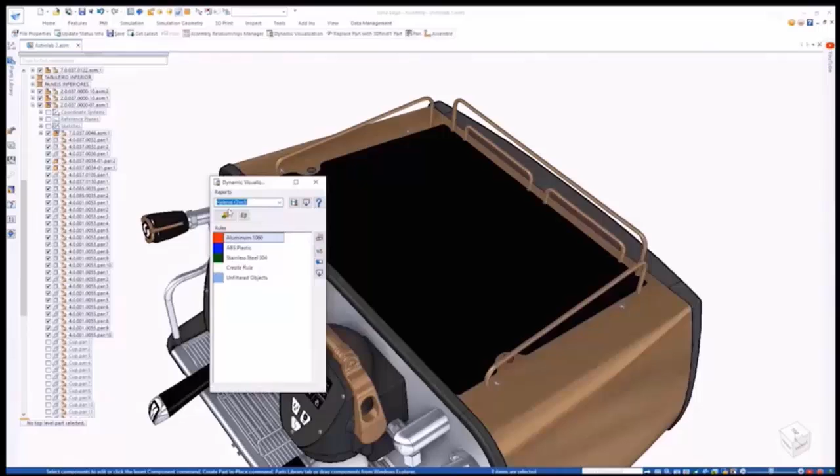The get latest command then provides a visual cue to users working in a collaborative environment and allows us to update the assembly by replacing the older versions with the very latest. Running dynamic visualization again allows for a quick visual check and ensures everything is now in order.

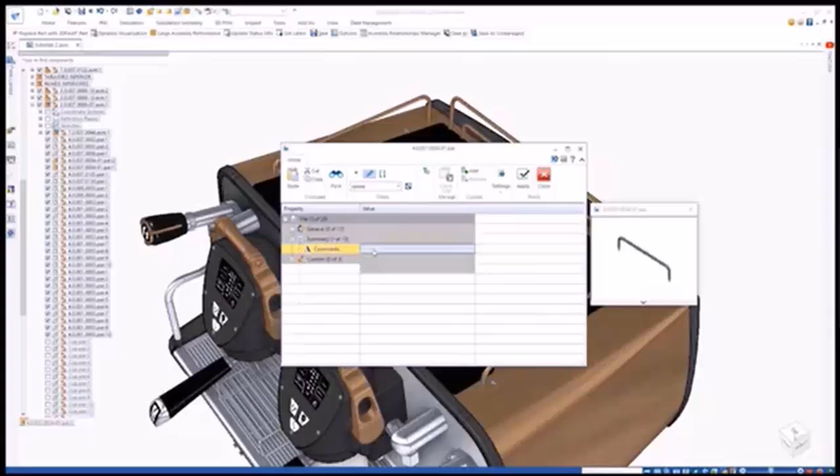A modernized, powerful file property dialog makes it even easier to search for, maintain, and manage document properties and metadata. We can filter the information to only show the editable properties and add new ones. In this case, a new custom property to define the finish for the handle.

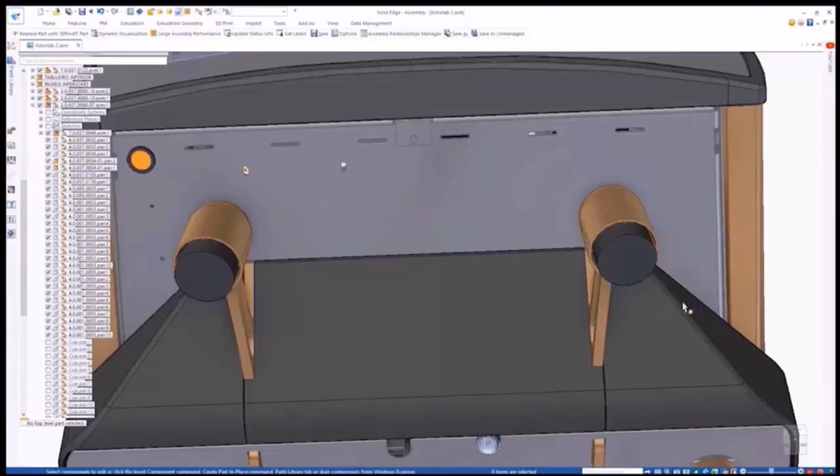The newly added 3D Find It and Replace Part with 3D Find It commands allow users to streamline the process of finding 3D components by searching supplier catalogs for parts that are similar in shape to the selected model. We can see this in action here as we look for alternatives to the rubber foot.

Once we have chosen the replacement part, we can change the parameters if needed, and then, at the click of a button, replace it in our assembly. The ability to use Pack and Go directly from Windows Explorer saves time if the desired assembly isn't already open.

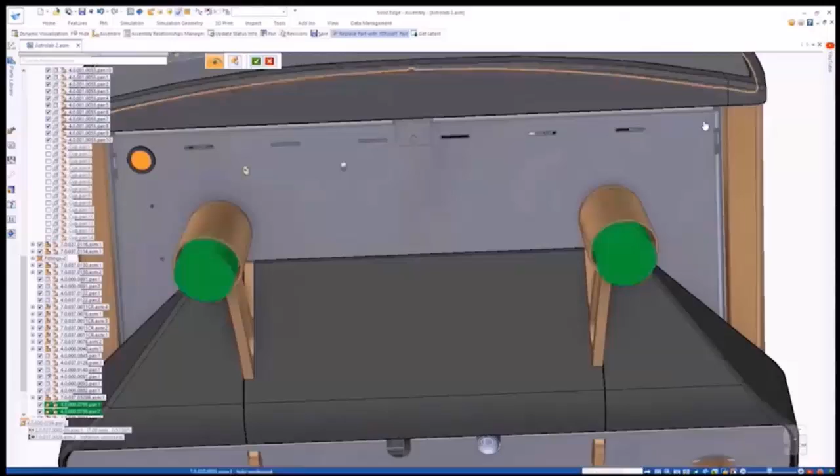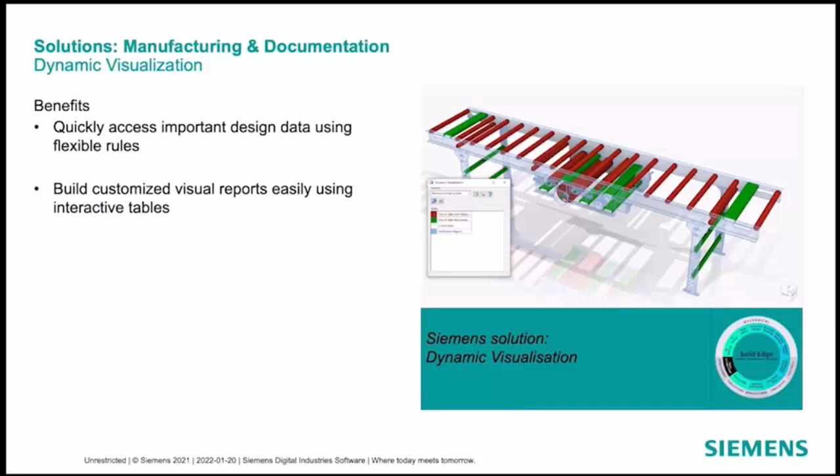For dynamic visualization, it quickly accesses important design data using flexible rules and builds customized visual reports easily using interactive tables. Now let me present to you some case studies.

Group SEB's industrial policy aims to serve markets in the best possible way by continuously improving competitiveness and quality standards with a view to the long term. With an in-house manufacturing base that is unique in its industry, Group SEB skillfully combines global industrial power with proximity to the consumer markets. Brands including Moulinex, Rowenta, WMF, Krups - each brand has a well-defined identity with specific values which are reflected in the product offering, features and design, as well as in appropriate communication mechanics.

So their challenges: shorten time for launching new products to market, transition local product development to cross-discipline processes, and align processes across more than 20 brands with multiple industries and geographies.

So the solutions: Solid Edge supports multiple CAD and ERP tools, implement a standard PLM data model that meets the needs of each Group SEB business, and deliver high-level business knowledge while formalizing integrated cross-discipline processes.

So the benefits: increased new products by 43%, from 140 to 200. Increased process reliability and standardization of policies. Capitalized on project know-how by making PLM tools accessible across the entire workforce.

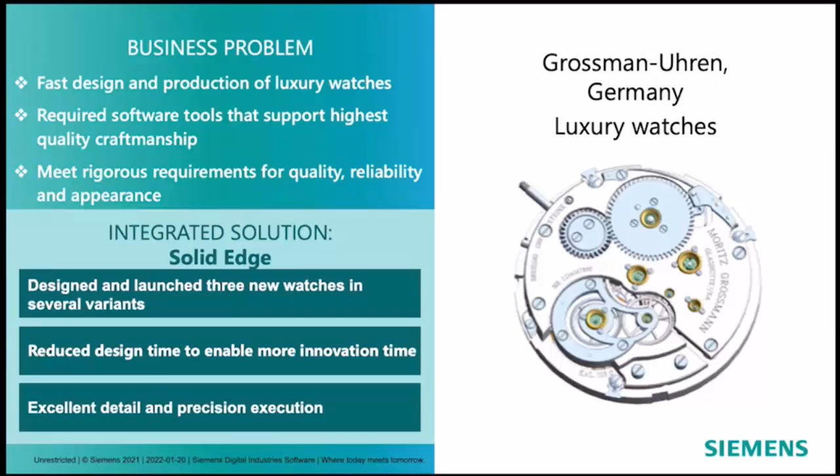From Jens Schneider, chief designer of Grossman-Uhren: using Solid Edge, I can handle the many changes and variants that occur in the design process much faster than in the past. The possibility to model parts within an assembly, as well as the integrated data management functions, offer a big advantage.

Next is Kimball International Inc. Kimball provides a variety of products from 2 business segments: the Electronic Manufacturing Services segment and the Furniture segment. The Kimball Electronics Group provides engineering and manufacturing services which utilize common production and support capabilities globally to automotive, industrial, medical, and public safety markets.

The Furniture segment provides furniture for the office and hospitality markets, sold under the family of brand names Kimball Office, National Office Furniture, and Kimball Hospitality. As with any company that adapts well to change, Kimball's flexibility and versatility allows it to stay ahead of business challenges, including the ever-changing office environment, along with escalating indirect and direct costs of running a responsible global company.

In 2008, Siemens PLM software launched Solid Edge with synchronous technology to enable users to accelerate new design processes, make faster changes to existing designs, and improve the reuse of imported data. Kimball moved to Solid Edge with synchronous technology to address its business and engineering challenges.

You can become more productive, you can enjoy more of what you're doing, says Espinosa. When you work with traditional CAD, product engineering work becomes very repetitive. With synchronous technology, you can participate more in the design process, the fun side of developing products. There's a nice return on investment when adopting synchronous technology, but our main reason for implementing the tool is to be more productive, design better products, and get to market faster in the design process.

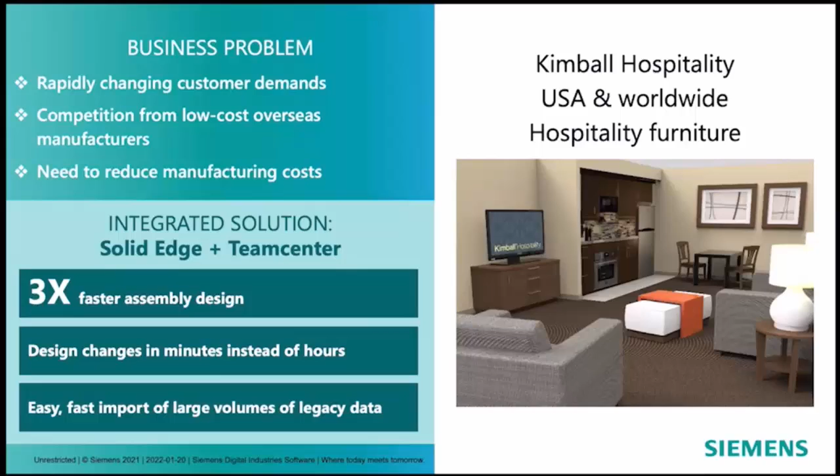Alright, so there are three key takeaways for today's presentation. First is to overcome your business challenges with our targeted solution. Second is win against competition thanks to unique differentiators. And third, reduce time to market and costs, increase productivity and profits.